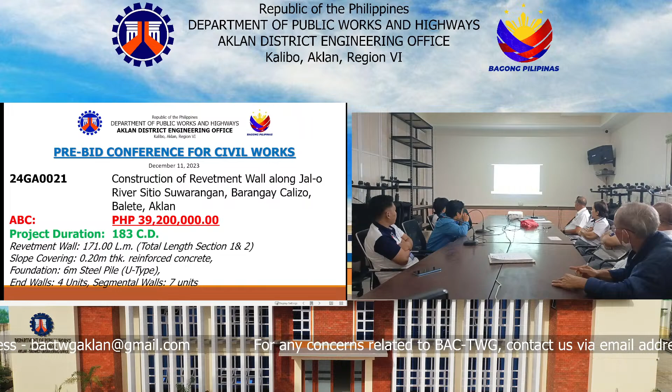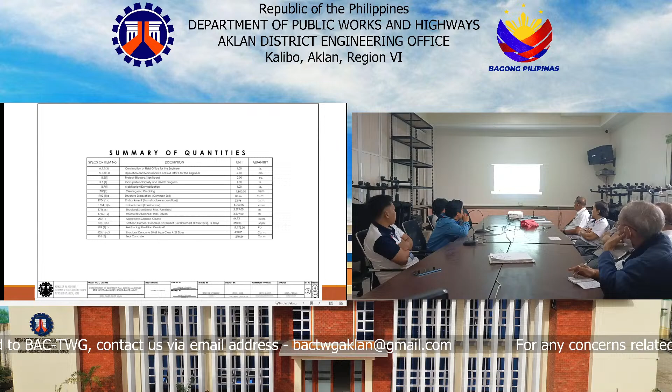For project 24GA0021, construction of Revetment wall along Jal-o River, Sitio Suwarangan, Barangay Calizo, Balete, Aklan, with an ABC of 39,200,000. The project duration is 183 calendar days. The Revetment wall is 171 linear meters, total length of section 1 and section 2, with a slope covering of 0.2 meter thick reinforced concrete with a foundation of 6 meter sheet pile U-type, and the end walls are 4 units and the segmental walls are 7 units. This is the location map, topographic layout, and this is the summary of quantities and the cross-sectional details of the Revetment wall.

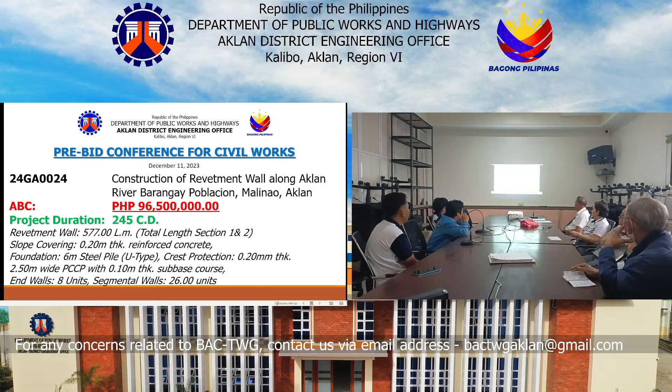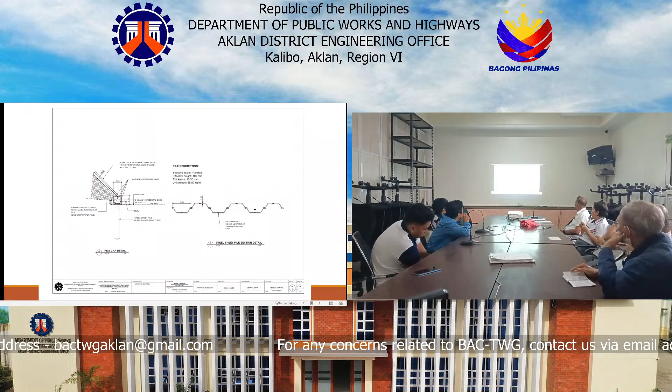For project 24GA0024, construction of Revetment wall along Aklan River, Barangay Poblacion, Malinao, Aklan, with an ABC of 96,500,000, and the project duration is 245 calendar days. This Revetment wall is 577 linear meters, total length of section 1 and 2, with slope protection covering of 0.2 meter thick reinforced concrete with a foundation of 6 meter sheet pile U-type. Crest protection is 0.2 meter thick, 2.5 meter wide PCCP with 0.1 meter thick sub-base course, with end walls of 8 units and segmental walls of 26 units. This is the vicinity map and location, the summary of quantities, the pile cap detail and sheet pile detail, and this is a typical section wall detail.

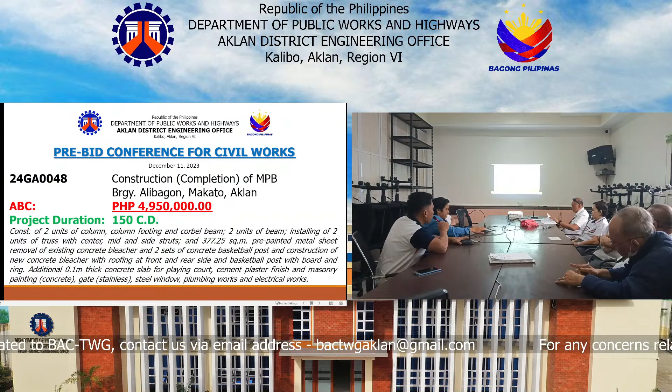Again, good morning everyone. With contract ID 24GA0048, construction completion of MPB, Barangay Alibagon, Makato, Aklan, with an ABC amount of 4,950,000, project duration 150 calendar days. Construction of 2 units of column footing and corbel beam, 2 units of beam, installing 2 units of truss with center, mid, side struts, and 377.25 square meter pre-painted metal sheets. Removal of existing concrete bleacher and 2 sets of concrete basketball posts, and construction of new concrete bleacher with roofing at front and rear side and basketball posts with board and ring. Additional 0.1 meter thick concrete slab for the playing court, cement plaster finish and masonry painting (concrete), stainless gates, steel windows, plumbing works, and electrical works.

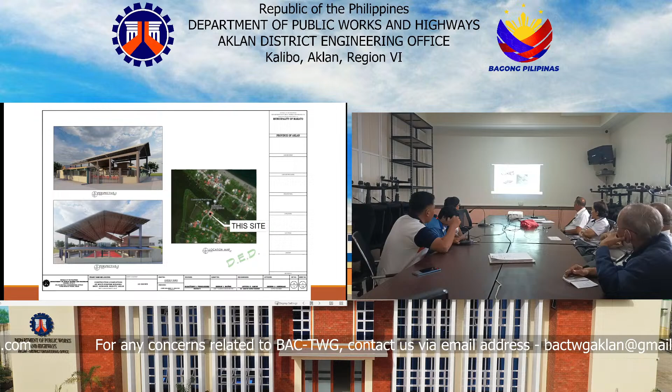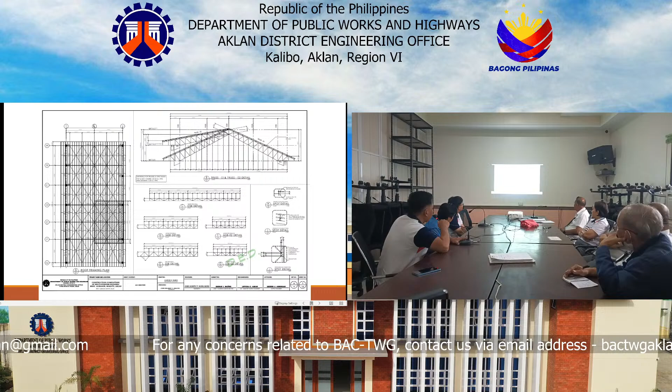That's the perspective, the site location, the floor plan and the sections, the foundation plan, the column detail. Next, the truss detail, the basketball concrete post, and the basketball board detail, the fence detail.

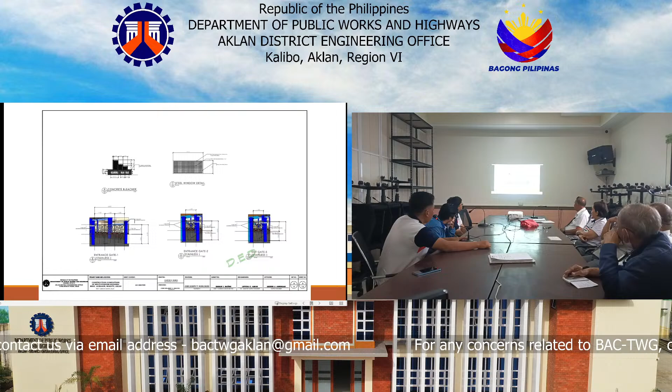For 24GA0099 is the construction completion of multipurpose covered court, Barangay Tambak, New Washington, Aklan, with an ABC of 2,970,000 and a project duration of 120 calendar days.

The project is the completion of the MPP consisting of 6 spans of roofing equivalent to 798 square meters of thermoplastic roofing sheets with purlins, gutter, flashing, and roof spandrel cladding in both front and rear portions of the covered court, as well as plastering and painting works, concrete leveling of the pavement, and sanitary works including 14 units of downspouts only.

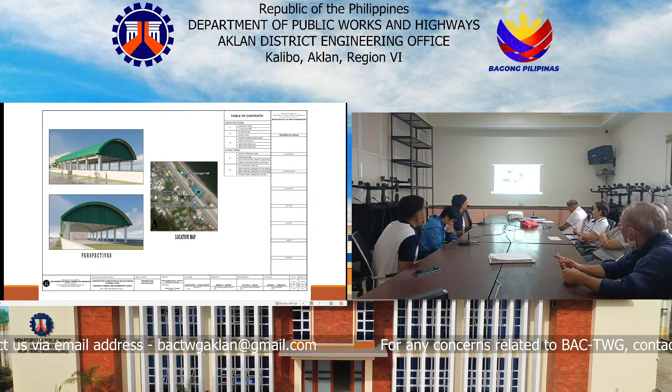This is the perspective and the location map, the floor plan and the roof plan, the elevations and the sections, the roof framing plan and the truss detail.

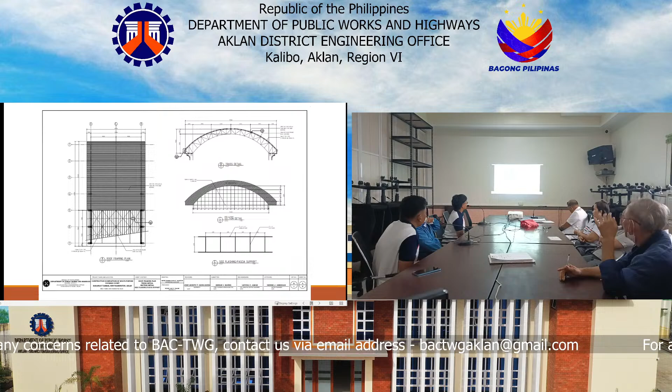So, any clarification or question regarding the detail of the project? If none, let's proceed.

Contractor applicants who wish to participate in the bidding are encouraged to enroll in the DPWH Civil Works Application, or CWA, at the DPWH Procurement Service, 5th floor, DPWH Building, Bonifacio Drive, Port Area, Manila. Those already enrolled shall keep the records current and updated.

The contractor's eligibility to bid on the project will be determined using the Contractor Profile Eligibility Process, or CPEP, and subject to further post-qualification. Information and legislation can be obtained from the PRS during working days, weekdays, from 7 a.m. to 4 p.m., or at the DPWH website, www.dpwh.gov.ph.